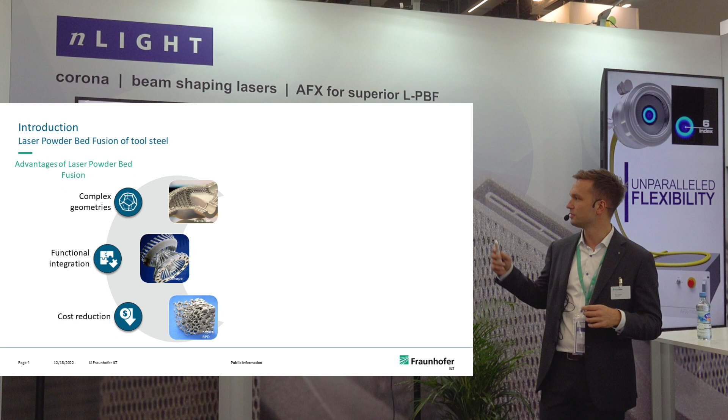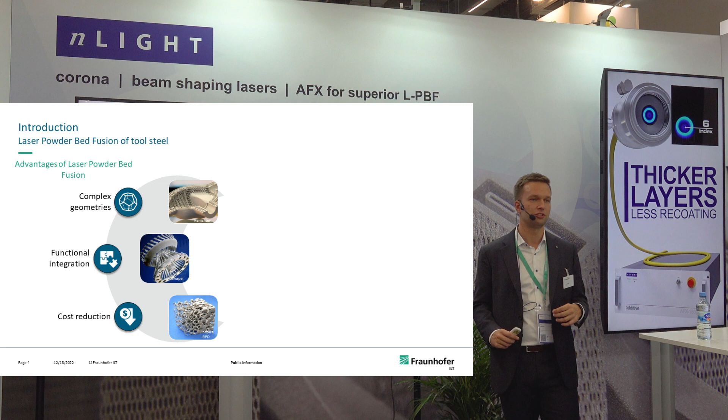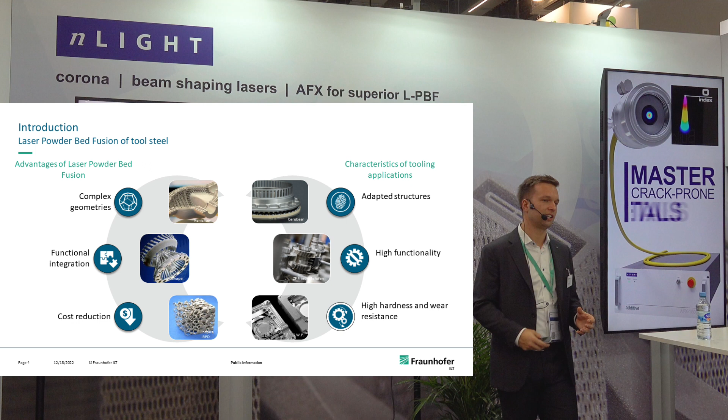As I mentioned, hard materials, and today's talk will only focus on steel, especially tool steel, is highly relevant. On one side we have distinct features that we can use from additive manufacturing to really generate highly complex and functional parts. And on the other side, we have characteristics of steel such as high hardness, high wear resistance, excellent properties for high performance applications.

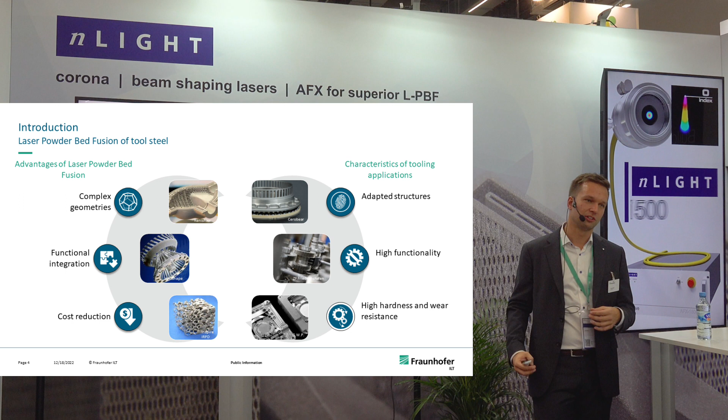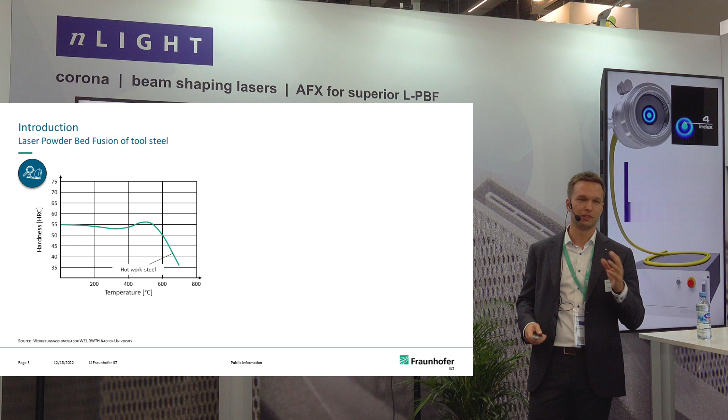To bring these aspects together is one of the key challenges that we are currently facing in powder bed fusion. So when you look at tool steel, a very commonly used word, tool steel doesn't necessarily always mean tool steel. There is a variety of tool steels that can be categorized according to their hardness and also to their maximum operating temperature.

So when you look at this graph, you see there is cold work tool steel, which is fairly good in terms of L-PBF processing, but lacks the properties, especially at elevated temperatures, and loses its hardness over the temperature.

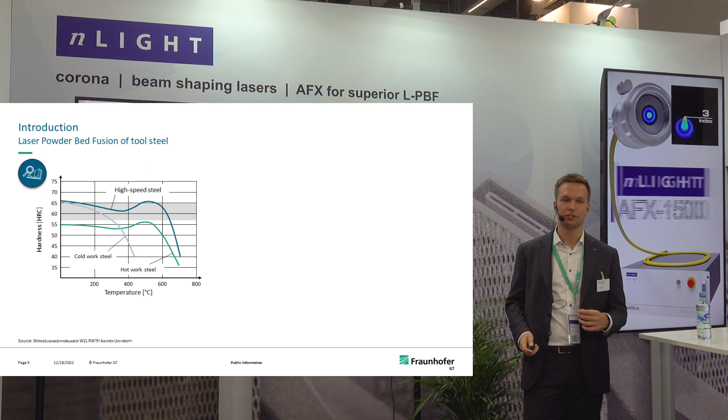For hot work tool steels, there are also some examples that can already be processed at elevated preheating temperatures, such as H11 or H13 tool steel. Those are fairly good in terms of the hardness over temperature curve, but of course their maximum hardness isn't as hard, so that you can't use it for tooling applications such as thread mills or such features.

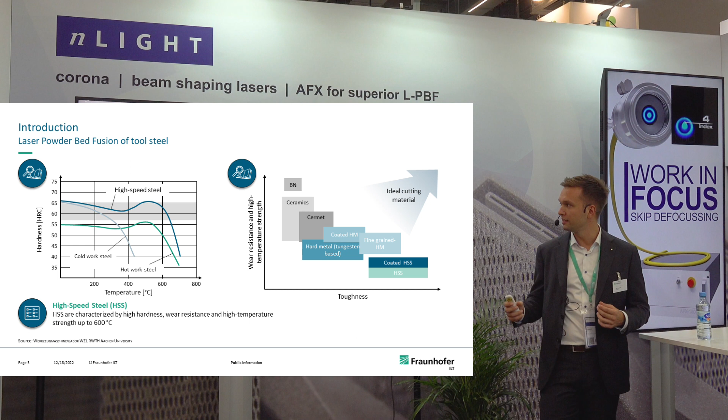And then when you look into the materials that are commonly used for cutting applications especially, you see that ceramic materials such as boron nitride or tungsten carbide-based cutting materials are state-of-the-art for a lot of cutting applications, just because they are very hard and therefore can be used to cut or mill a variety of materials. But one of the key disadvantages of these ceramic materials is that they are very brittle, so tool failure is usually catastrophic.

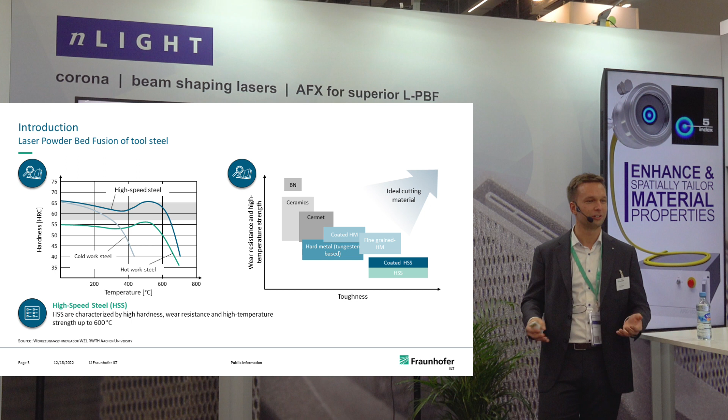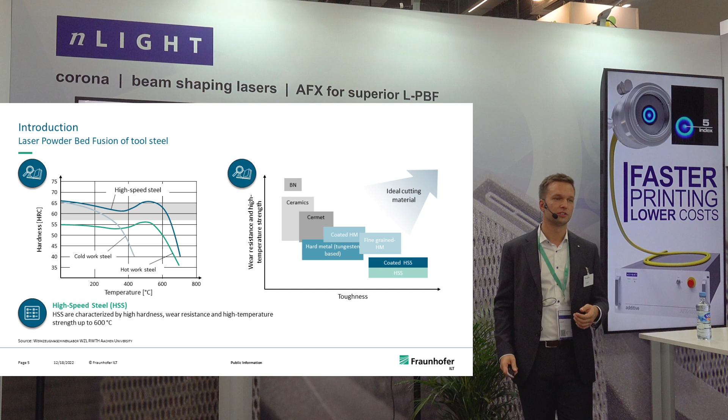So either your tool breaks or it works. There's not a lot in between. What is actually quite interesting is the high-speed steels that are also shown in the curve. Those are not as hard, but have fairly good impact toughness, for example, so that they are a bit more ductile in terms of the applications.

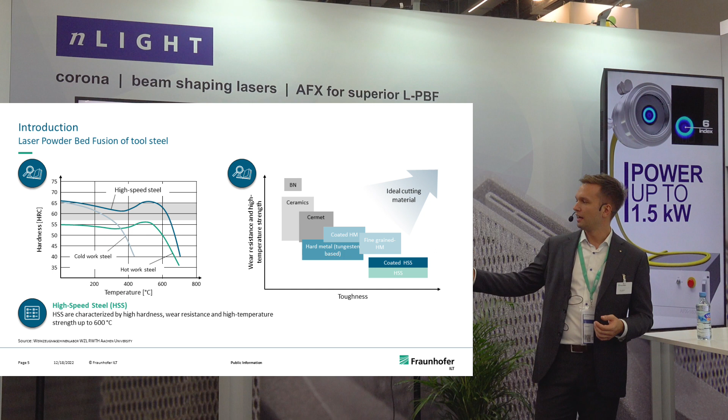So, to give a short summary of the material we are targeting: high-speed steel, very good hardness, especially at elevated temperatures up to 600 degrees C.

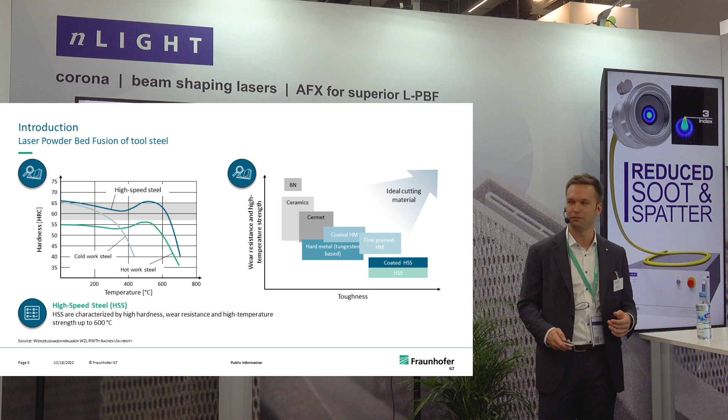But in terms of L-PBF processing, high carbon content is a nightmare—it's usually classified as non-weldable, so very challenging to process via powder bed fusion. And that's exactly what we are aiming for.

So when you look at cut sections from these steels, or even entire parts, depending on the process parameters and geometry, you can end up with one of two things: either a lot of hot cracks that form during solidification, or large cold cracks when you cool down the parts after the build, leading to cracking of the entire part. In some cases you see several millimeters of deformation just due to cracking.

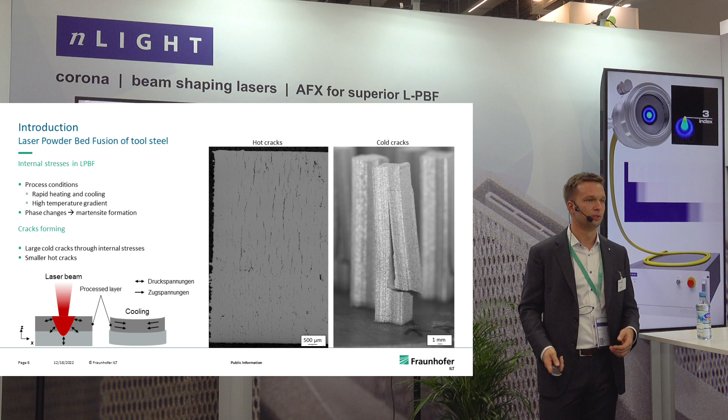These defects result from the complex temperature fields we have in powder bed fusion. Usually you have quite rapid heating and cooling cycles which happen very fast, with discrete solidification, and therefore inner stresses that can build up and, as a consequence, lead to these defects in the component.

What we did to address this topic is use one of our lab systems. This is an Aconity machine, very flexible—you've seen it in the previous presentation. Very good to work with in the lab.

What's special about this machine is that on one hand we can preheat the build plate up to 800 degrees C for these hard-to-weld materials, on a reduced build volume of about 100 millimeters diameter. On the other hand, we have an optical system with two laser beam sources that can be combined via a beam switching unit.

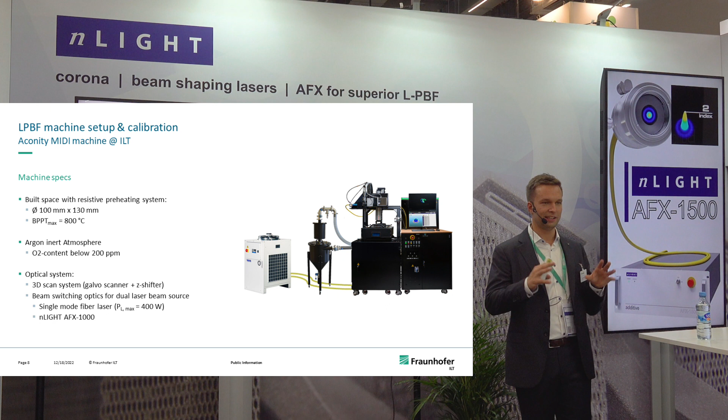I'll show you the schematics in a bit. This gives us the opportunity to do a real side-by-side comparison of a single mode fiber laser and the AFX under exactly the same processing conditions in our machine, just altering the laser source and the intensity distribution respectively.

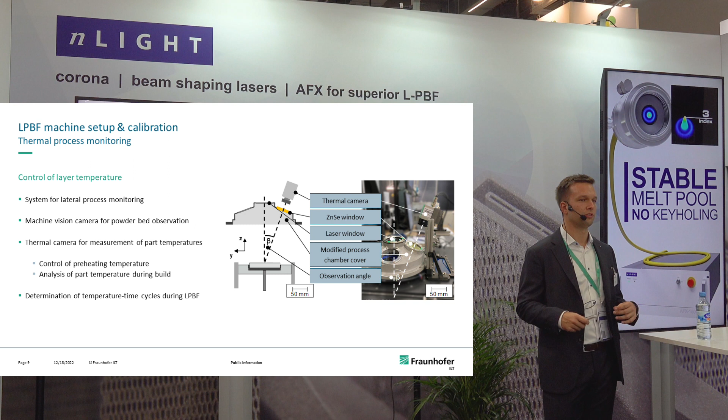Additionally, we also have our monitoring systems installed. We have a modified chamber cover that we can equip with a thermal camera and a process camera to observe the L-PBF process, to control the actual layer temperatures over the build, and to see if we have overheating or if the preheating system is delivering the temperature we are setting it to.

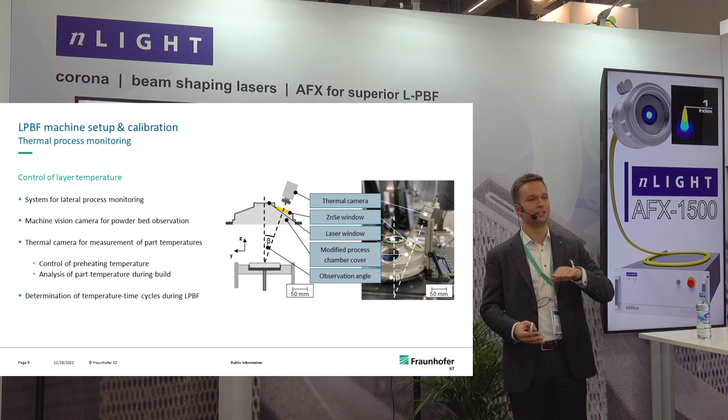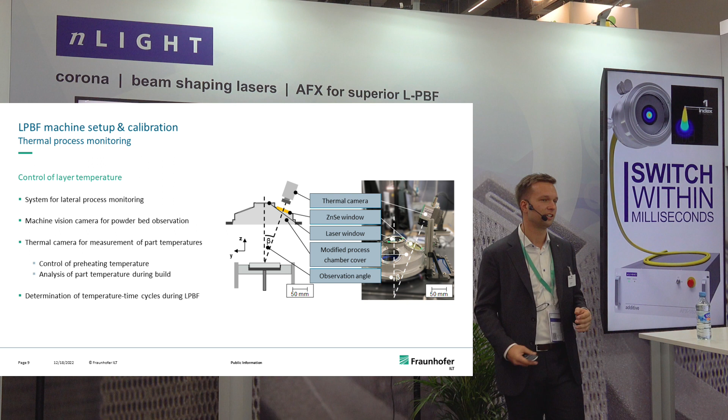This is quite useful if you want to maintain homogeneous processing conditions. If you imagine building up a larger component and just set the base plate temperature constant, most likely the temperature in the active layer you're currently processing will change, because the distance between our heat source—the plate—and the active layer becomes larger and larger. So you have to think about measures to compensate these losses.

As I mentioned, we have a beam switching system that allows us to select one of two laser beam sources: one being our AFX laser, which yields beam diameters between 130 and 340 microns depending on the AFX index setting; and in our first beam path, a standard single mode fiber laser, yielding a beam diameter of around 75 to 80 microns—more or less state of the art as in most machines right now.

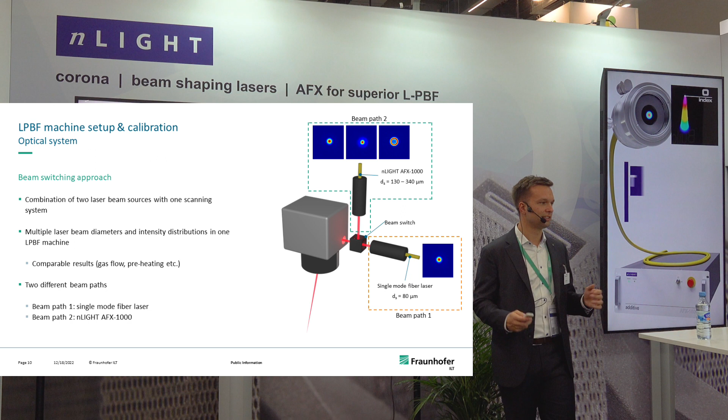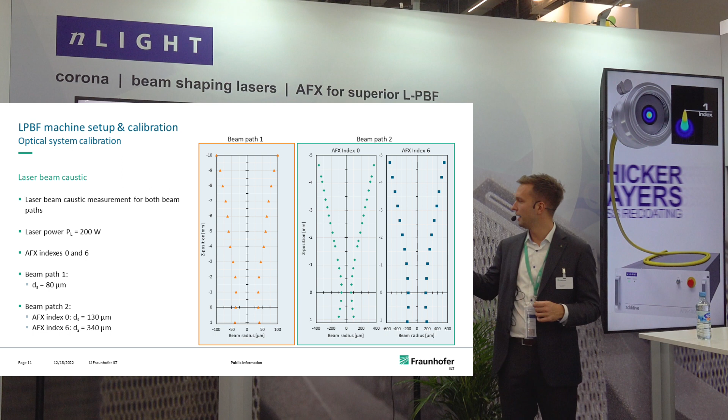Of course, we need to check that it actually works. We did full characterization of both beam paths—for the single mode and the AFX, we analyzed laser power characteristics and the caustic. We found that both intensity distribution and laser beam diameter were as expected: about 80 microns for beam path 1, the single mode fiber laser, and beam path 2 between 130 microns for index setting 0 and 340 microns for index setting 6.

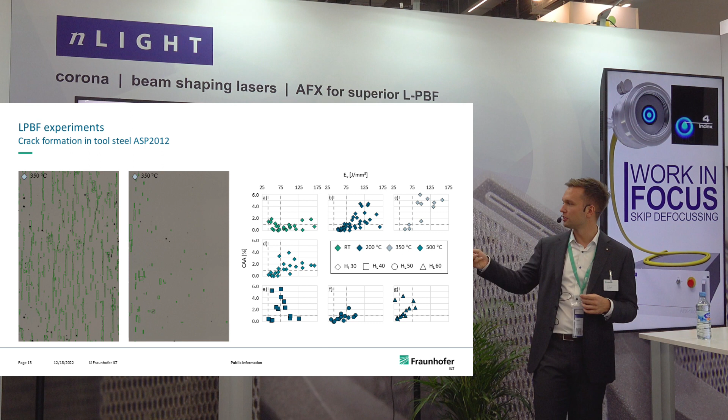Then for the experiments, we first did baseline experiments—state-of-the-art Gaussian beam, preheating, temperature variation, and build-up of multiple specimens. We have some in-house software tools to analyze the cracks forming during processing, characterizing crack density, meaning the amount of cracks or the cumulated crack length per square millimeter or centimeter. Across all the different layer thicknesses, preheating temperatures, and energy densities, you will in some way end up with cracks.

You can have more cracks or less, depends. At room temperature it's mostly cold cracks, and then when you go up in temperature it's mostly hot cracking, but you're hardly able to produce crack-free, or technically crack-free, specimens.

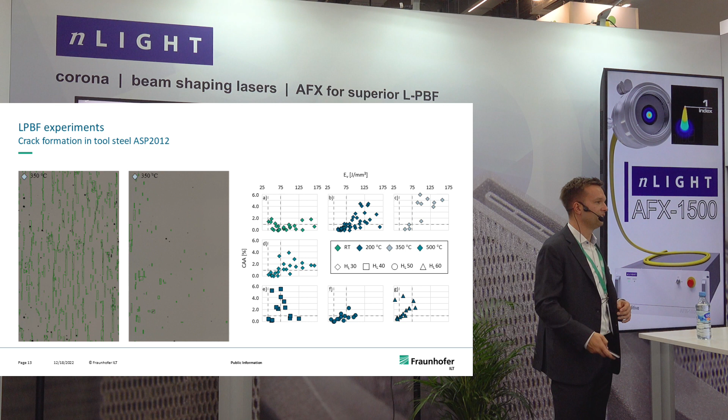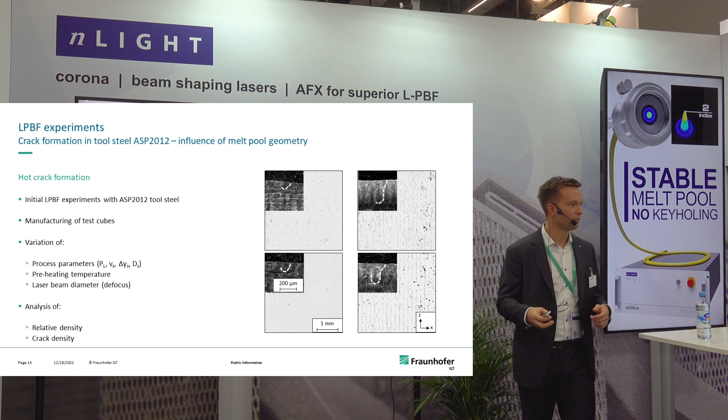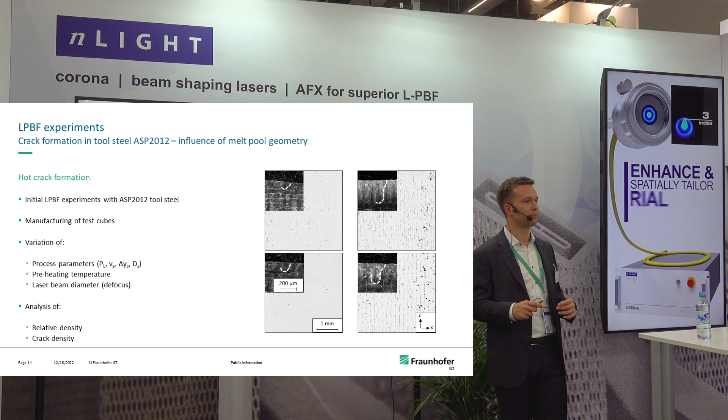What we found as part of these baseline investigations was that the amount of cracking really heavily depends on the geometry of our melt pool. You end up with rather little cracking, or next to no cracks, when you have a very shallow and wide melt pool, and you end up with a lot of hot cracks, especially over several layers, when you have very deep and narrow melt pools that commonly occur in what we call transition mode welding. This is quite common for standard L-PBF processing parameters, because you continuously remelt multiple layers, and this is not necessarily good for inner stress buildup and hot crack formation, especially for this high-strength steel ASP 2012 material.

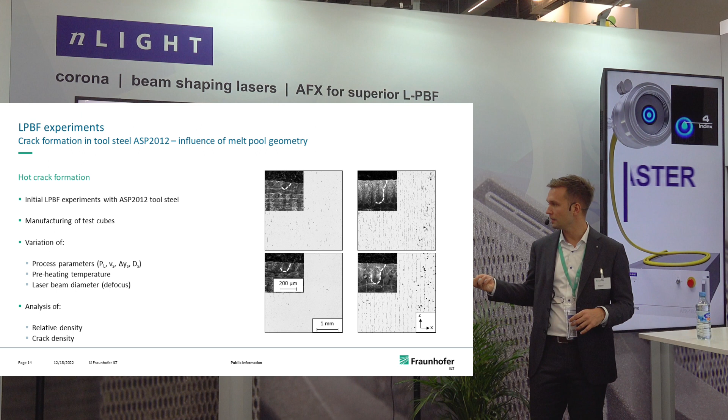So we figured it would be useful to do some additional tests based on the results we already had from the AFX. We already knew we can generate very nice and flat melt pools with it.

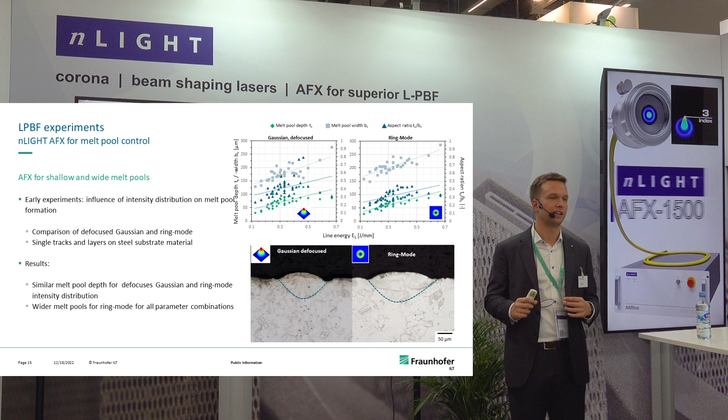So we thought it would be favorable to also run the AFX tests on this setup, to see if we can bring down the crack density even more when we modify our intensity distribution.

As a last step, I've brought a video of the process with the AFX laser that we ran, I think, beginning of last week. It works well. It's a really nice process.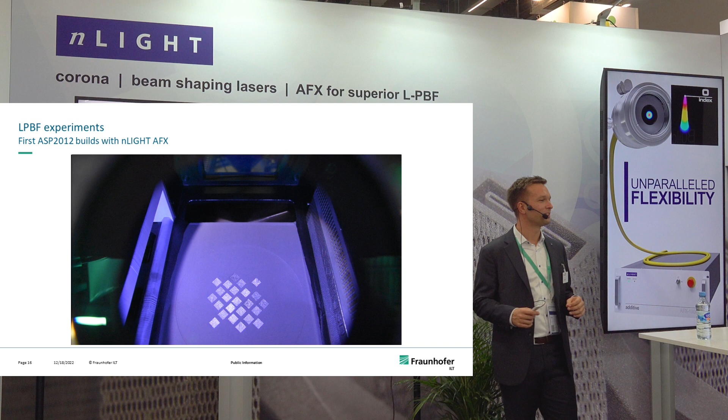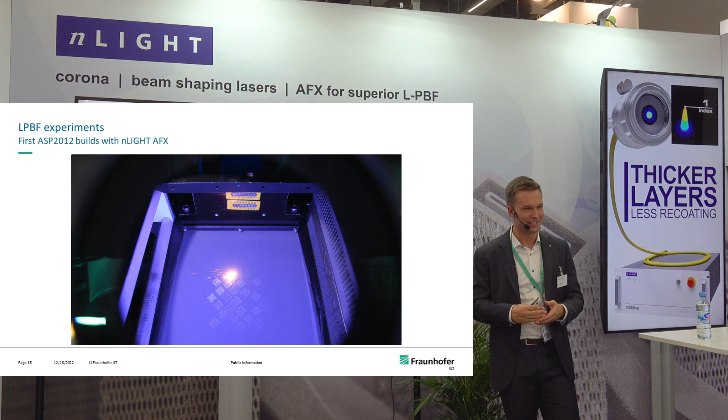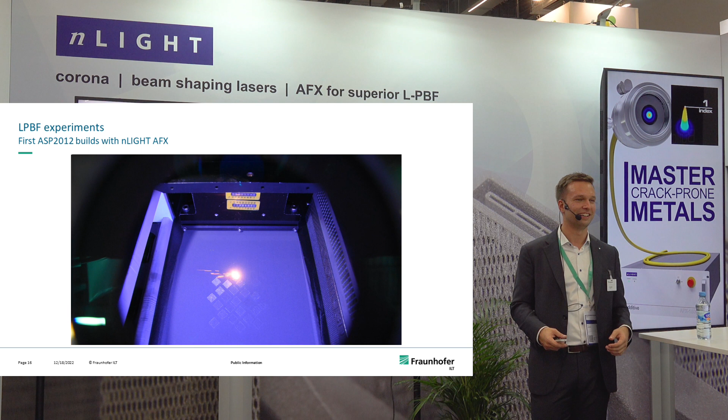I haven't got the results of the crack density yet, because the material is very hard, so cutting the material from the plate and doing the cut sections for analysis is quite challenging. You have to find suitable tools to even cut the material, because this is usually used to cut other stuff. But the first impression is the process works fine.

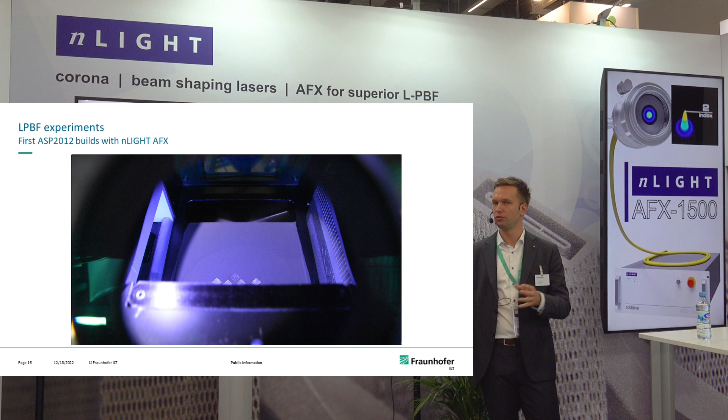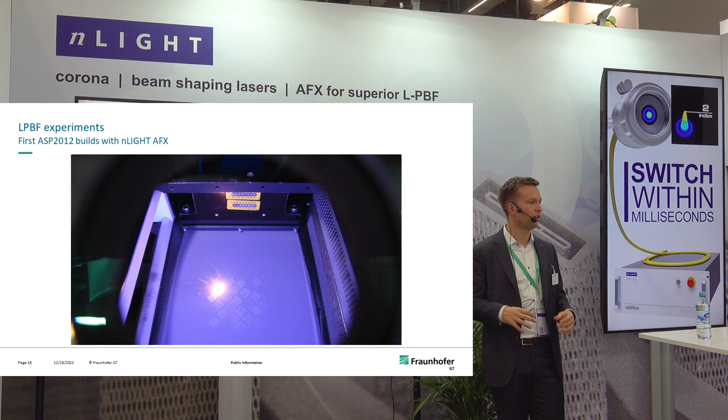We will do a detailed analysis of melt pool geometry versus crack formation, and we really see a lot of potential in the additional degrees of freedom the AFX technology brings when it comes to processing these hard-to-weld materials, which are very sensitive to temperature fields and the continuous remelting that usually occurs in L-PBF.

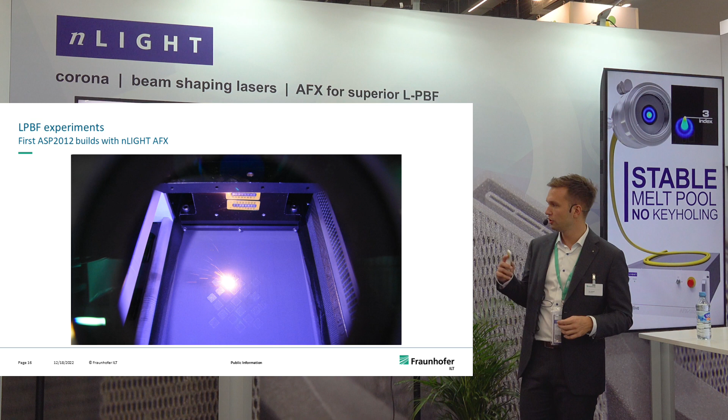We have now got the machine set up. We have everything set. We have the opportunities to do a lot.

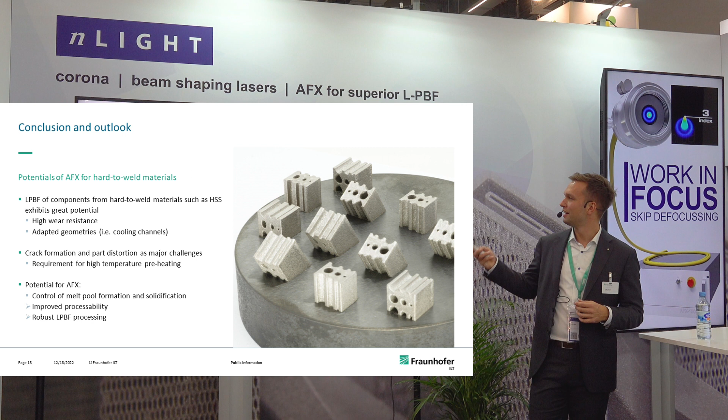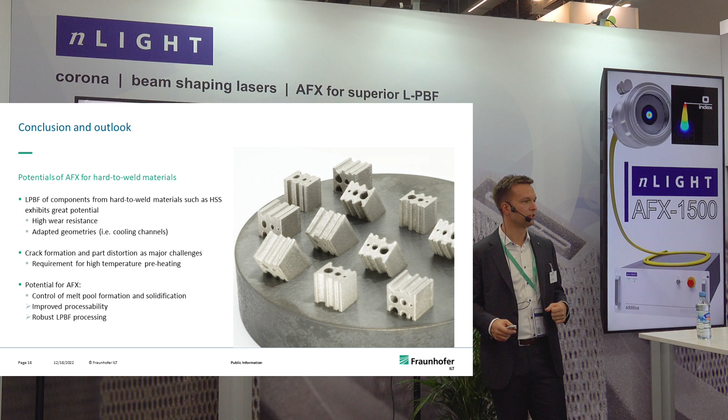Where we see the next steps in this project is that we really see a huge benefit in processing hard materials, which are usually hard to weld as well, because they can be used in tools to adapt, for example, cooling channels in thread mills or other milling components, through the degrees of freedom we have in the design.

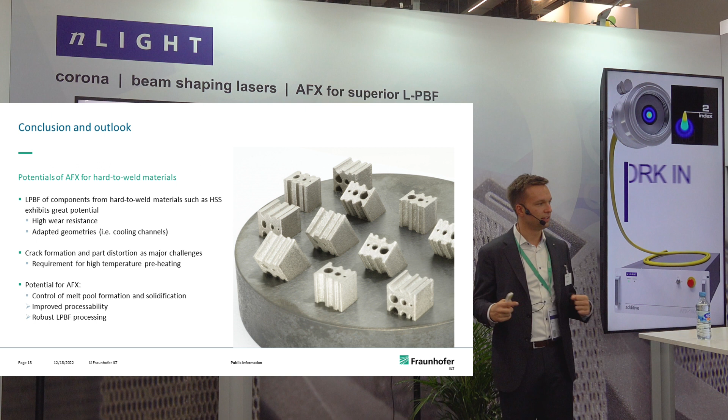But of course cracking is a major challenge when it comes to manufacturing components out of these materials, and the potential for AFX we see at the moment is that we have additional degrees of freedom apart from preheating to very high temperatures or modifying just laser power, scan speed and hatch distance accordingly. We also have control of our intensity distribution, which helps us control the solidification conditions and therefore reduce cracking in these components.